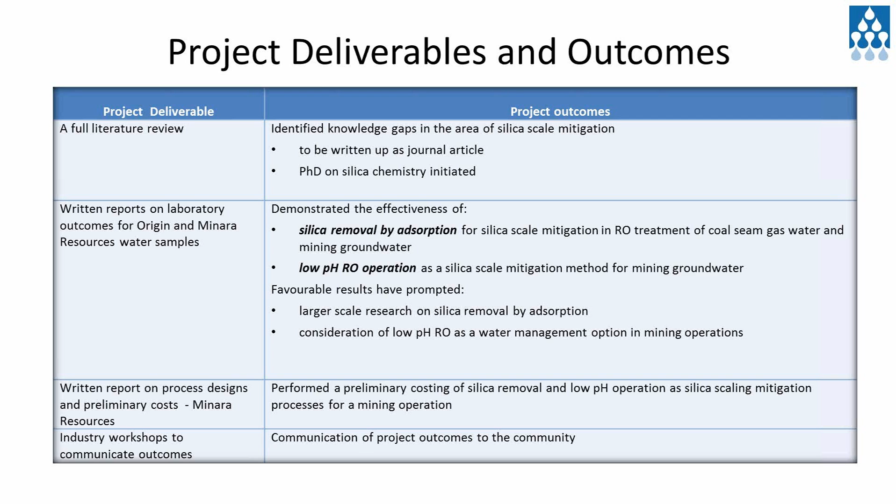We carried out a preliminary costing of the options for the mining water, and I'll be showing some results there. Finally, our last commitment was to participate in a workshop to show our results to the general community.

As an introduction, I put up a graph of the expected silica concentration as a function of water recovery, for a water that has 74 milligrams per litre silica. There you have two curves: the blue one is the silica concentration that would occur if no scaling occurs, and the red one is the actual concentration of soluble silica that occurs if silica scale starts to happen.

You can see in this curve you have consecutive doubling of the concentration as you go from 50 to 75, and then doubling again to 87.5. So that by the time you get to about 94%, its concentration would be 16 times the original concentration.

But as I said, we get silica scale formation, and to avoid that you have to run the RO process at a water recovery that is below that threshold. So with this one it would be roughly 60%.

Now, this limit I've put in, 200 milligrams per litre for silica, is very dependent on the actual water composition. It's very different to the type of calculations you can do for salts, for example, where you know the solubility quite accurately. For silica, it's very, very dependent on the composition of the water.

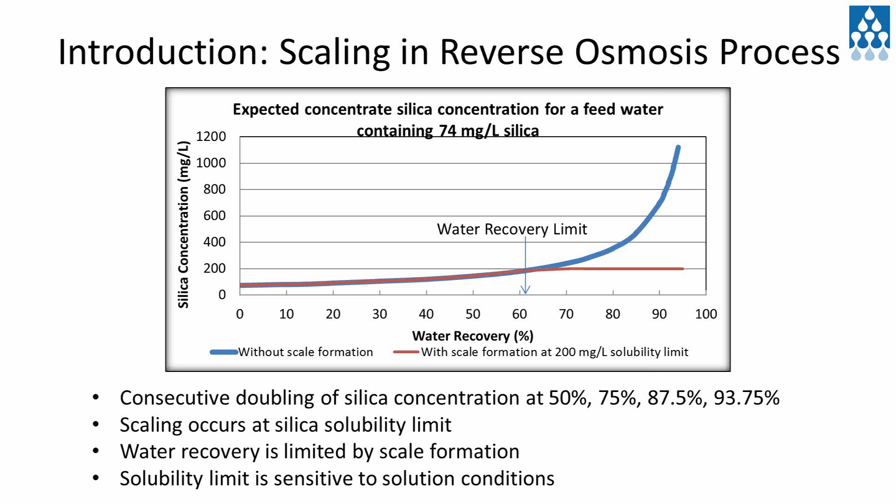This slide is supposed to show that there are different factors that must be considered when thinking about the solubility of silica. Firstly, there's silica's behavior in water - simply the reaction of water with SiO2, forming silicic acid. That's quite a simple system, and you know the concentration, the solubility, will increase with increase in temperature, according to a relationship that's been found empirically. There are, however, other factors which are important, and pH is really the greatest.

What you have is silicic acid acting as an acid, as the name suggests, and these are the acidity constants shown there at 25 degrees. Now you can see the first reaction has an acidity constant of 10 to the negative 9.8, indicating that at pH 9.8 there's roughly equal quantities of the anionic species and the non-ionic species.

If you increase the pH even further to 12, you get the production of the divalent ion as more acid comes off, more protons are released.

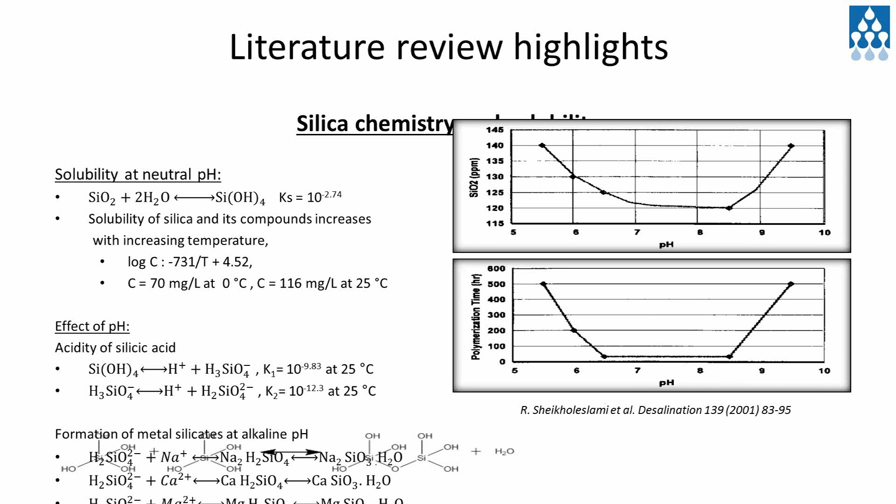The reason for that is probably that some of the silicic acid is being changed to silicate ion, so there's a lower concentration, and that's... but Nick will be talking about the chemistry in a little more detail later on, so you'll see the proper equations in Nick's presentation.

So in looking at the literature, we found two real ways of approaching the problem. One is to remove the silica, and one is to operate the RO under conditions where the silica has a higher solubility, so it doesn't precipitate.

Looking at the removal, there's a whole host of ways you can remove it. As I mentioned earlier, you can add calcium and magnesium under alkaline conditions, and that'll form the calcium-magnesium silicate precipitate. You can add other ions such as iron 3 or aluminium. You can generate the ions in solution by electrolysis, an electrolytic sacrificial electrode.

Or you can do a whole host of adsorption studies, or ways of absorbing it, using different adsorbents such as hydroxides or some naturally occurring minerals such as goethite, gibbsite, and alumina.

Another way is also seeded precipitation. If your solution is super saturated with respect to silica, if you add a seed of silica, you can induce that precipitation to take place. But that's only to the solubility limit of the silica.

And finally, you've got ion exchange, which you can do. If your silica is in the ionic form, you can absorb it or remove it onto ion exchange.

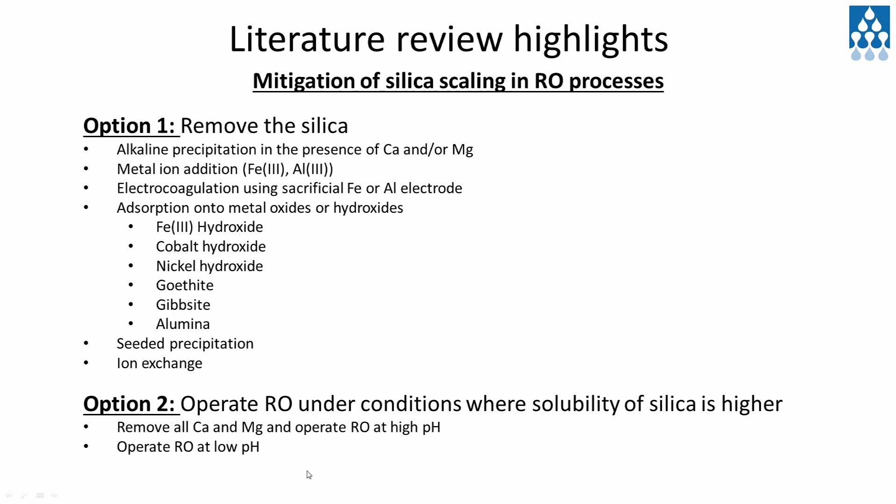So one of the waters that we started to work with was the coal seam gas water. In the process of extracting gas, you've got to extract an overlying layer of water, and that water contains a lot of salt. The volume that you have to extract to remove the gas is really quite considerable. It's estimated to be 150 gigalitres per year for the Queensland Basin.

Origin has the capacity to treat 32 megalitres per day in its current operations. Now, the water is so salty that RO is used to treat it, but they can only go to a water recovery of about 80%. After that, you start to get scaling.

So they would love to be able to decrease the volume of waste, that 20%, down to something more manageable that can be used in evaporation, or even to extract some of the valuable salts. I think that contains a high concentration of carbonate or bicarbonate, so you might be able to extract those. So you could reduce the volume to about a quarter.

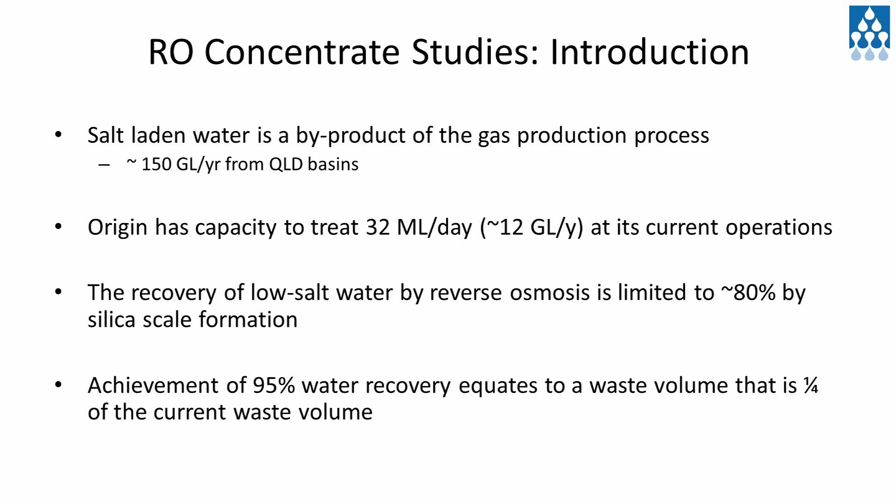Another benefit is also not only in the volume reduction, but also what you do with the water that's produced. You can actually make the area where you're doing your gas mining a very productive area by using the water for irrigation.

There I've shown a couple of graphs. What I've done is worked out an example of what happens if you're working at 80% water recovery with a volume of about 11,700 megalitres per year.

Since you're at 80%, you only produce about 9,300 megalitres per year of irrigation water, and that will allow you to irrigate about 1,600 hectares. The brine produced is 20% of the original figure, so about 2,300, and you would need an evaporation area of about 230 hectares. So if you do a ratio of the two, you see that you're able to irrigate only 7 times more than you have to take up by building evaporation ponds.

I've actually done that calculation for higher water recoveries, and the graphs at the bottom show the results. They've been corrupted a bit in loading them onto the presentation, but I think you can see a linear increase in the amount of area that you can irrigate. It's quite considerable, from about 1,500 to about 1,900.

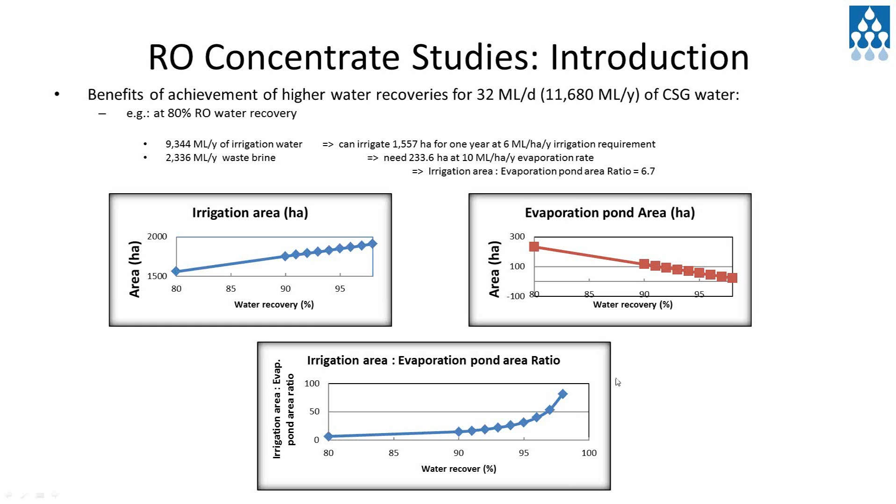The RO concentrate that we used, we of course analysed initially just to see what sort of things are in there. Things to note here: calcium and magnesium are quite low in these waters. Another thing is the organic carbon is quite high—it's a coal seam gas water, so it's not surprising that some organics have gotten incorporated into that water.

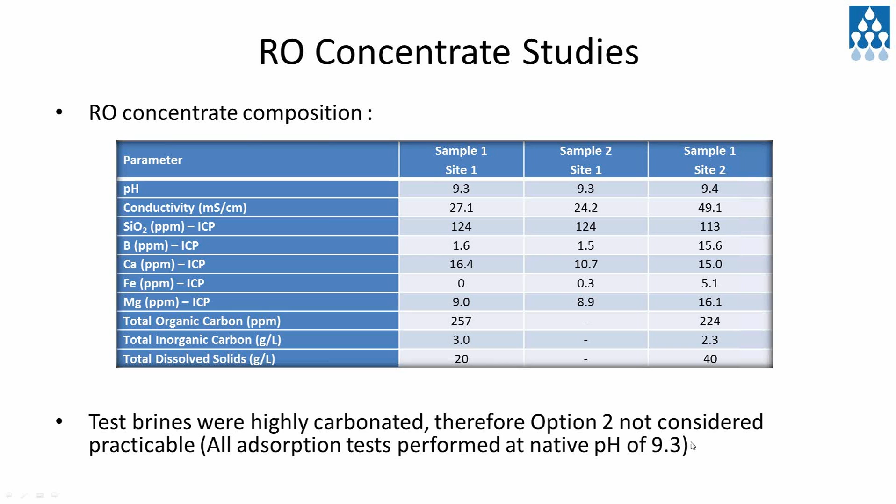Another thing about this brine is that it's very highly carbonated, as I mentioned earlier, so we were restricted to procedures that don't change the pH. So the low pH RO was ruled out, and also changing the pH to get better adsorption was also out of the question. So we worked at the native pH of 9.3.

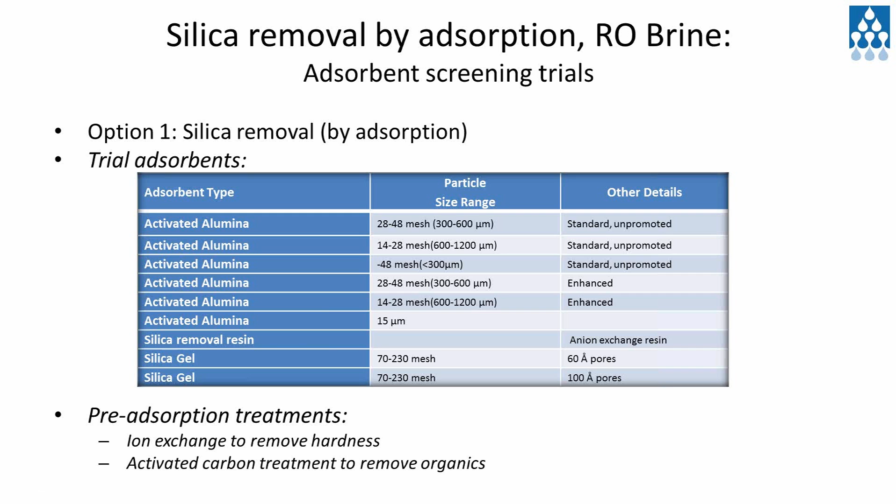We chose from the literature a number of promising adsorbents. Activated alumina was found in the literature to be quite promising, so we chose two different activated aluminas of different particle size. We also looked at silica removal using an ion exchange resin, and also silica gel of various pore sizes. What we also did was see whether pretreatment improves the adsorption using these adsorbents—pretreatment using ion exchange to remove the hardness, or using activated carbon to remove the organics.

Here's a result of the ion exchange pretreatment, just to show you that it's doing something. It's actually reduced the calcium and magnesium quite well for this sample from site 1. For this sample, we still have residual quantities of calcium and magnesium.

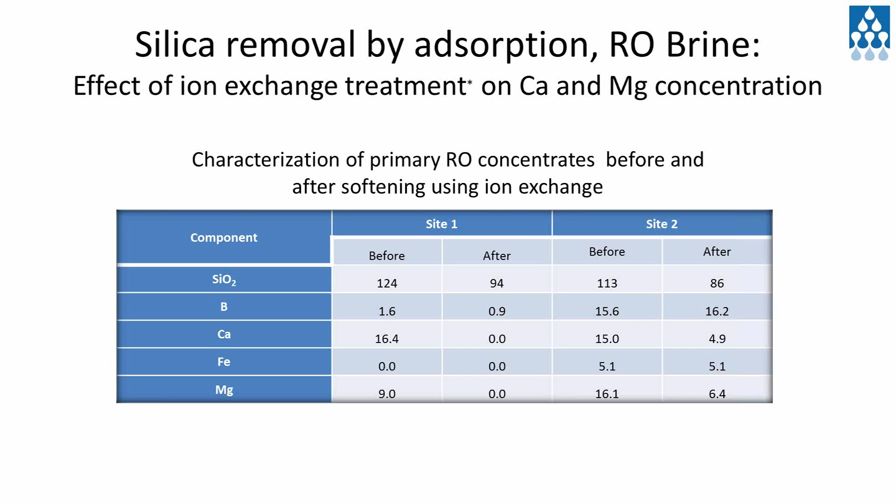We then took these treated samples and put them through the adsorption process using different aluminas. Now here you see on the left of the graph what I've called activated alumina 1, of different particle sizes. It's not surprising that the lower particle size works best because of the higher surface area. There we have the result for ion exchange.

That's an ion exchange process for removing silica. There we have the results for another activated alumina, and then the silica gel. You can compare those to the initial raw water concentration and the softened water concentration, and you can see these ones are the best out of this lot. Interestingly, some of them are even higher than the initial quantities of silica—that's basically because these are silica gels and they're dissolving in the water, making it worse.

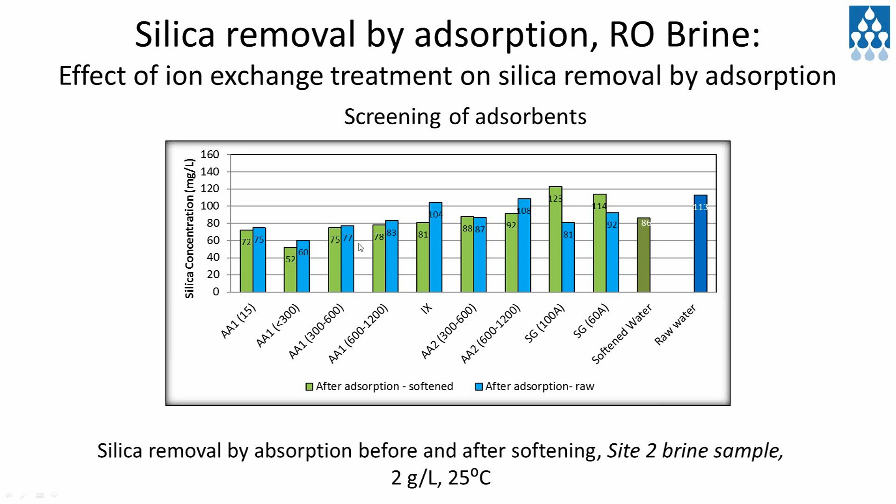Next we had a look at activated carbon as a pretreatment to remove the organics. We did UV spectroscopy on the sample before and after this AC treatment to see what's being removed, and you can see activated carbon is able to remove some of the components but not others. For compounds that absorb UV at 220 nanometers, that lower wavelength, for this higher wavelength there's quite a lot, almost total removal by the carbon.

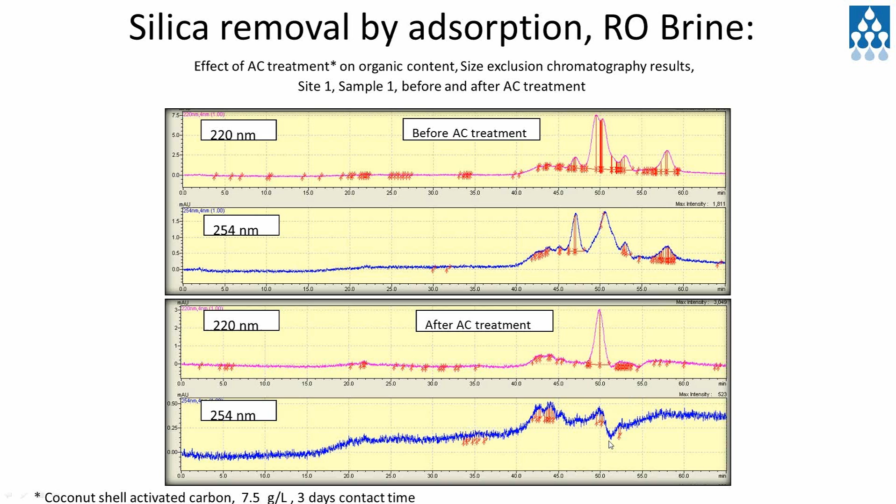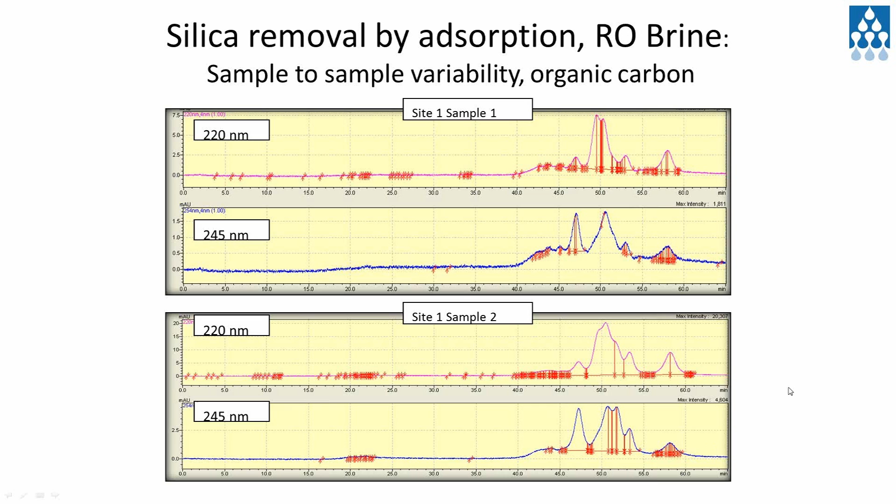We also found there was considerable difference in the organic carbon content of the samples, even from the same site. These are two samples from different times, and you can see quite different peaks, different quantities. Some peaks are not there initially, but they are after. So quite a lot of variability there.

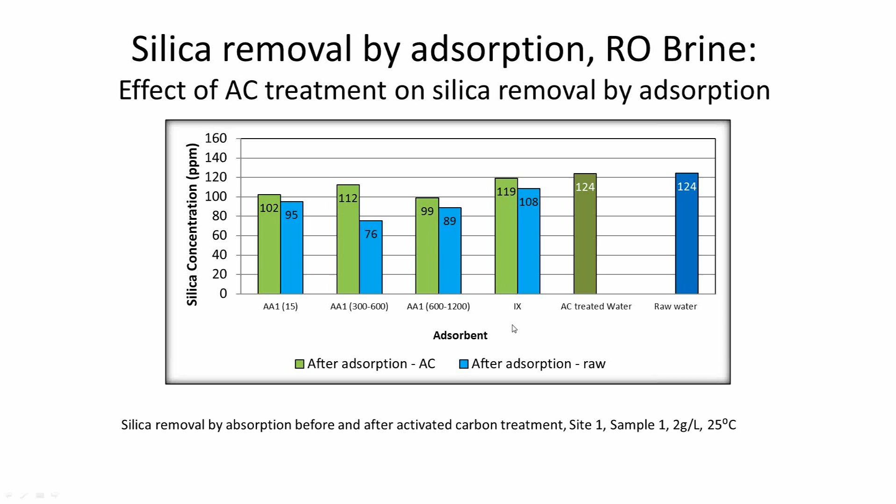These are the results for activated carbon treated waters, just to see if it makes any difference. This is a different sample, so the raw water values are different to the earlier graph. But you can see definitely that activated carbon treatment doesn't improve the adsorption at all—in fact, it seems to be making it worse. How that is, we don't know. The fact that they're all higher makes you think it's not just experimental variability, but there's something going on there.

To sum up this section, removal of calcium, magnesium and organics does not improve silica removal by adsorption, and activated alumina is able to actually reduce the value down to a lower value.

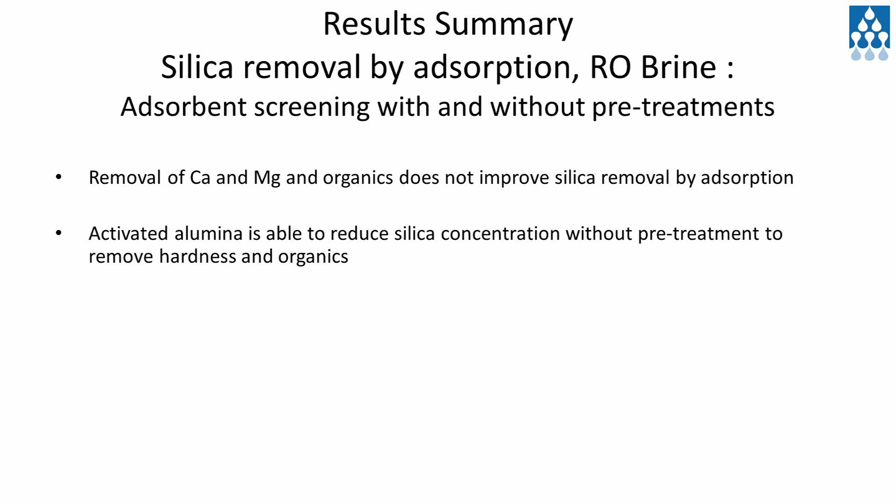We next went and picked out 3 of the activated aluminas that we trialed and did some further work to try to optimize the conditions a little bit.

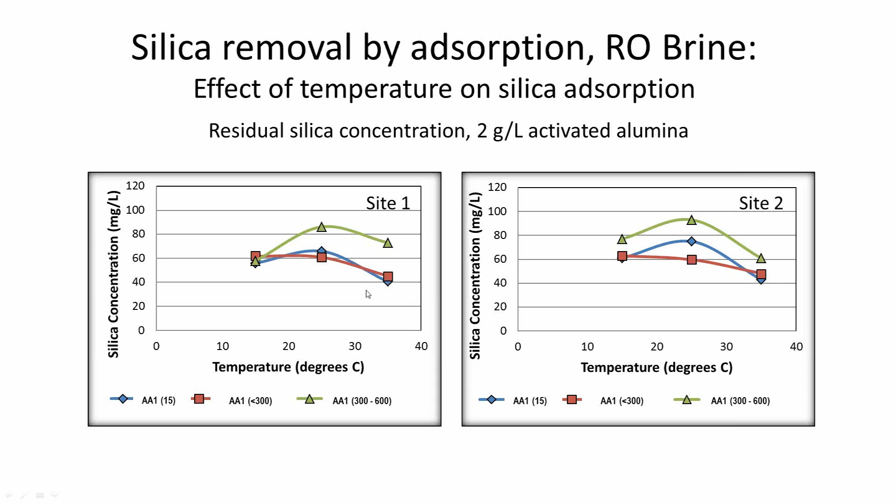Here we show the effect of temperature. You can see for the 2 samples they both have this curious hump at about 25 degrees. What we believe is going on is that we have two things happening: an increase in adsorption capacity of the alumina at higher temperature, but also increased solubility. I think it so happens that the solubility wins out over the increased adsorption at 25 degrees. But you can see that a higher temperature is actually quite a good thing to do - the best results are achieved at that higher temperature.

This is adsorbent dose, and you can see the 2 samples needed different quantities of adsorbent. So this really tells you that you have to do this sort of work to determine the optimum conditions for each specific site that you're going to be treating.

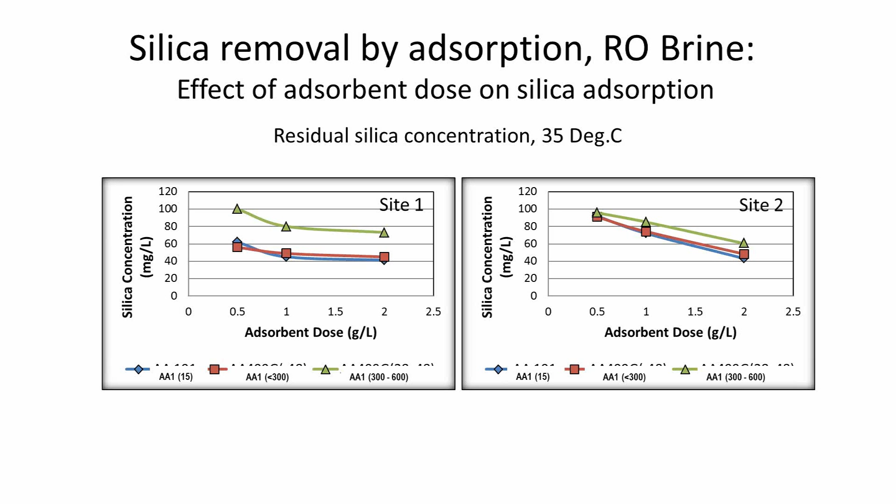To sum up this section, we know that silica removal by adsorption onto activated alumina is favoured by high temperature and high adsorbent dose. We know that we're able to get to about 45 milligrams per litre of residual silica using adsorption.

Given that the initial RO concentrate was at 80%, the curve shows us that we reached this 200 milligram per litre limit at about 80%. So we need to keep the water recovery below that for this RO treatment. Overall it ends up being about 96% water recovery. So that's very promising.

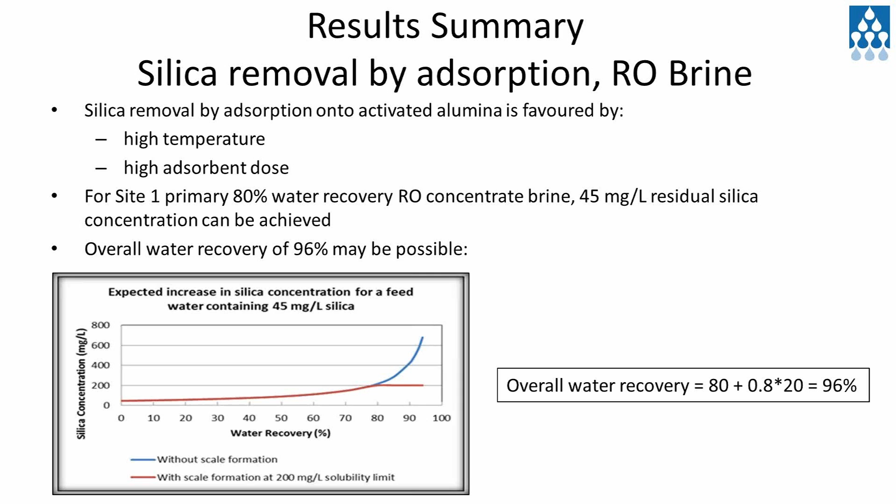The next slide shows really what I was talking about before, about the ratio of the amount of area that you devote to evaporation compared to the amount of area that you actually use the water for a useful purpose. So that's that graph put up again, just to give you a visual image of what's really happening - this is for 1/7 of the irrigation area at 80% water recovery.

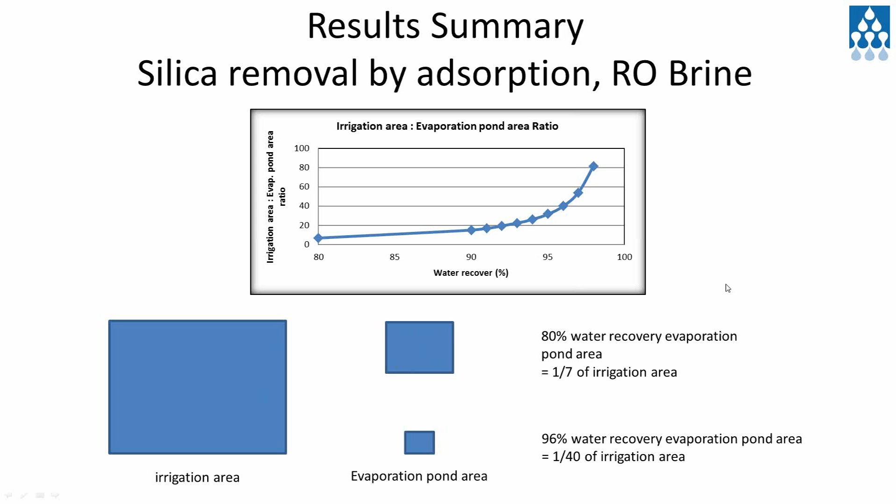You can use evaporation ponds that are 40 times smaller than the area that you irrigate. And then I think you can see that it's a much more viable process, prospective, to actually use this scenario rather than this, in terms of practicality of handling all this enormous amount of brine.

We also had a look at regeneration of the activated alumina. So you can adsorb the silica onto it, but can you reuse it? These experiments were performed to see if we can get the silica off the adsorbent and then use it again. These are some of the results.

You can see that we did a number of steps of sodium hydroxide treatment at 25 degrees on this activated alumina, and you can see that the silica concentration is quite high. It's coming off the adsorbent, but we also have quite a lot of aluminium being liberated as well.

So the alumina, we know, is a little bit soluble at alkaline pHs, and that's something that will have to be considered - that you're going to lose some of your adsorbent if you use caustic as a regenerant.

So that's just reprocessing of that data - the silica desorbed as a percentage of what's being loaded onto the alumina. You can see you'd need about 10 steps to reach about 80 or so - that's 10 rinses, if you like, with sodium hydroxide.

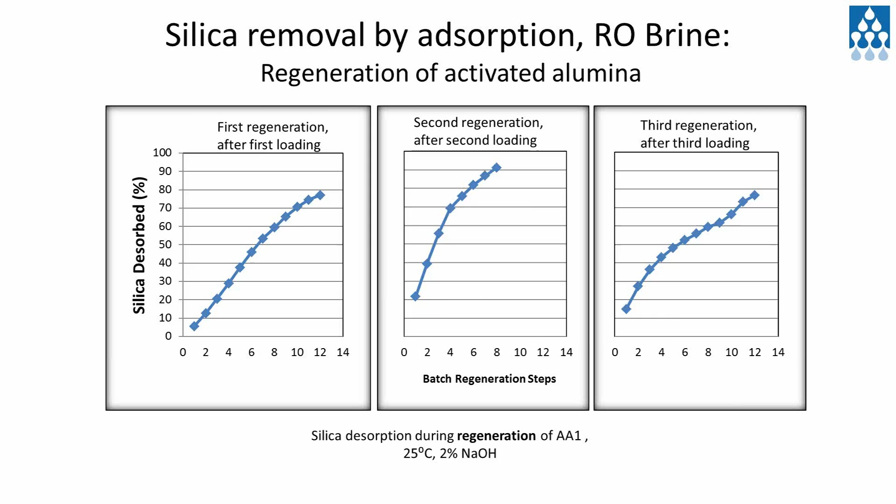And that's the adsorbent lost, the amount of alumina that's being lost. So it's quite considerable - if you take the average of those three, it ends up being about 5 or 6.

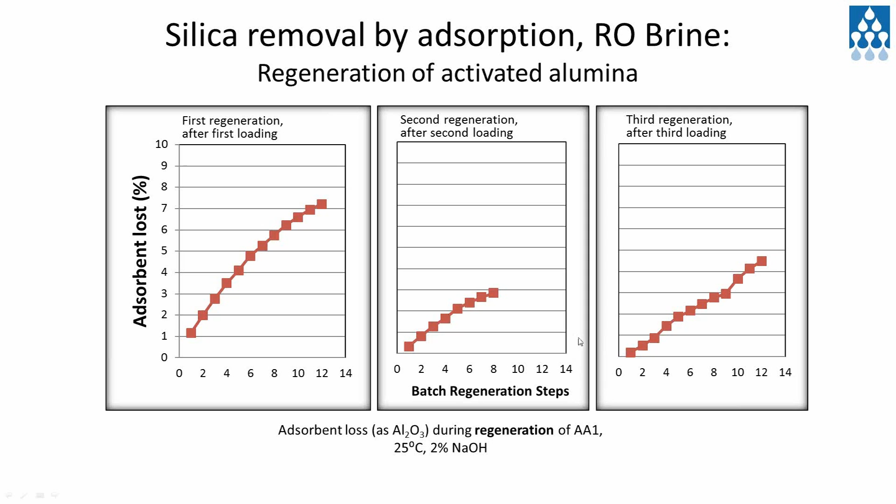That slide's just basically a reiteration of that earlier slide. So to sum that up, regeneration of activated alumina is possible using 2% sodium hydroxide. The silica loading rate of the regenerated adsorbent is still good after 3 adsorption, desorption trials, so that was good. But we had approximately 6% loss of alumina with each regeneration.

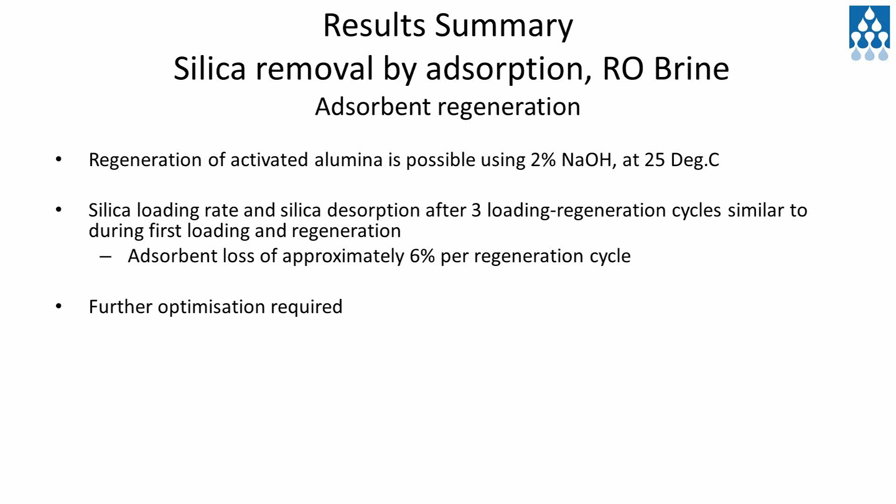So that's something to bear in mind, and you'd certainly want to optimize that on a larger scale. This is just lab experiments in small beakers.

Going on to the Minara Resources water - now this was a groundwater used by the company. It's actually a nickel mine, and it uses quite a large amount of groundwater, about 26 megalitres per day. This has to be desalted because the salts interfere with the process of mineral extraction, and also the salts corrode the process equipment. So what Minara does is they do a RO on it, but they can only achieve about 60% water recovery before silica starts to be a problem.

So if they could achieve 95%, that would be an enormous benefit to them. You'd get about 1/8 of the volume of waste from the process, and 1.6 times as much usable water out of the water that you extract from the ground.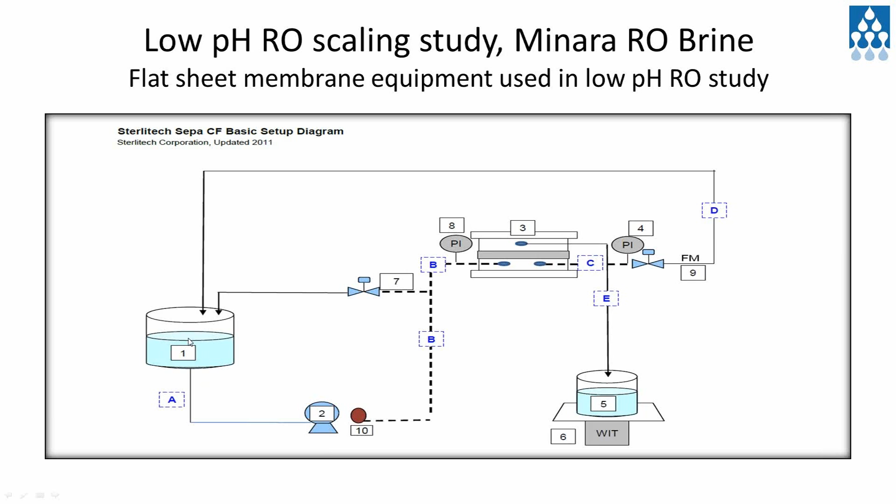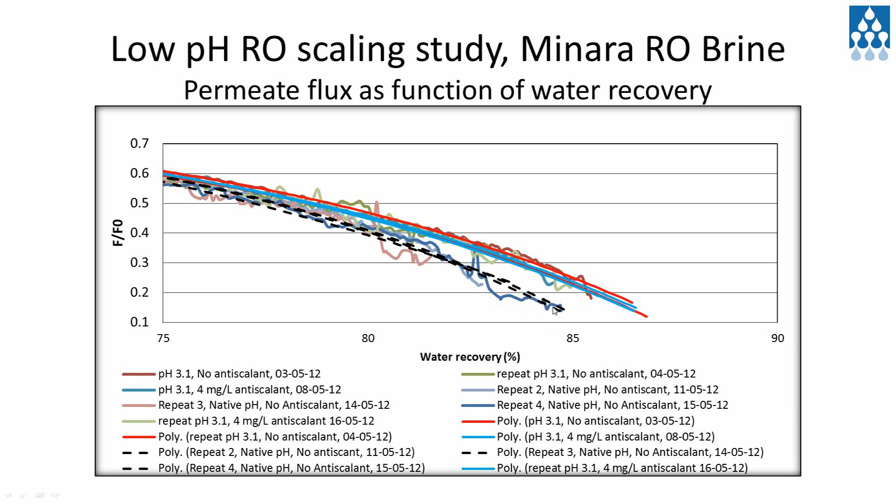The low pH runs were able to maintain a higher flux for longer, or higher water recoveries, than the native pH runs. You can see that having anti-scalant, the blue, is with anti-scalant, the red is without, and there's quite a good agreement of the results. At low pH, the anti-scalant doesn't seem to be making any difference, whereas we get quite a lot of flux decline with the native pH runs.

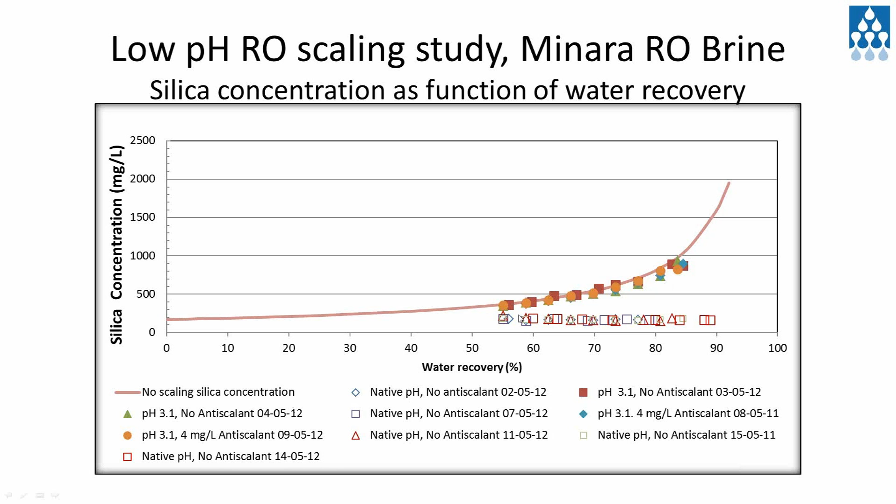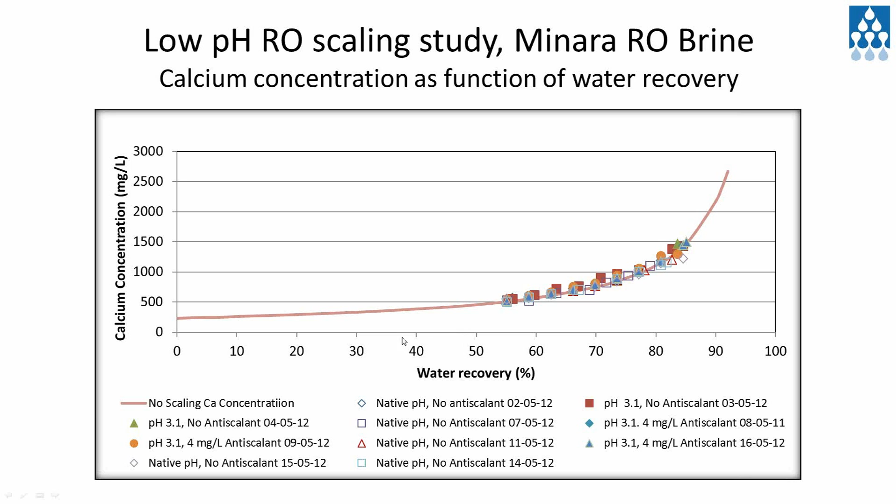What we did with the membranes at the end of those runs was put them through FTIR, and these are a few of those results. In grey here we have the unused membrane, which has its own characteristic peaks. The pH 3 curve showed us a little bit of difference in some peaks here. These peaks are probably bending vibrations of silicon and oxygen bonds.

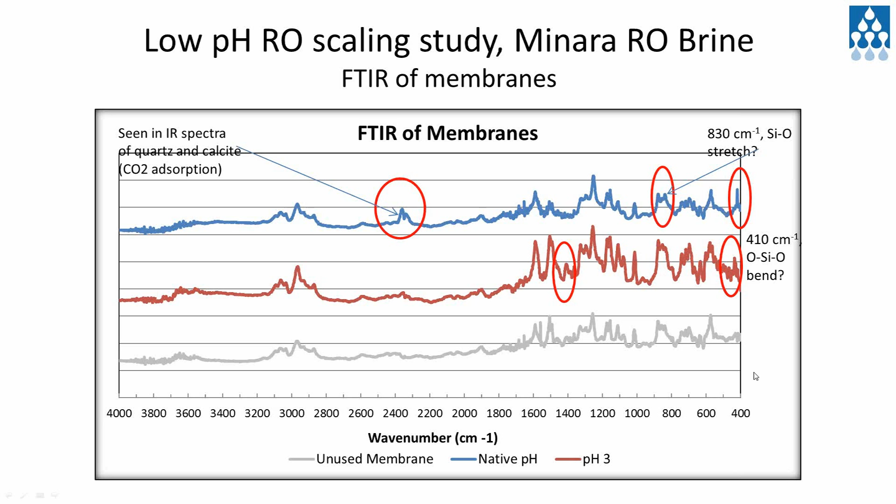This one we're not quite sure about, but you can see with the high pH run we also have another peak here, so perhaps a silicon oxygen stretch there. That's probably an artifact, often seen due to CO2 adsorption, so it could be that someone breathed on the membrane after collection. So that tells us there's something to do with silica perhaps happening in this membrane at high pH. When you have a look at them under the SEM, you can see the unused membrane.

It's really quite clear, there's no particulates there. This is all the material that the membrane is made of. At high pH, you can see lots of scaling, as you'd expect, enormous amounts of scale that's obstructing the view of the membrane completely.

And then finally, if you have a look at the low pH membrane, you can see that it's roughly, a lot of it's similar to the original, but there's some what look like to be scale particles there. Now that's not a representative sample, so you can't really say how much from that, but you can say that it probably started at scale at the end of that run.

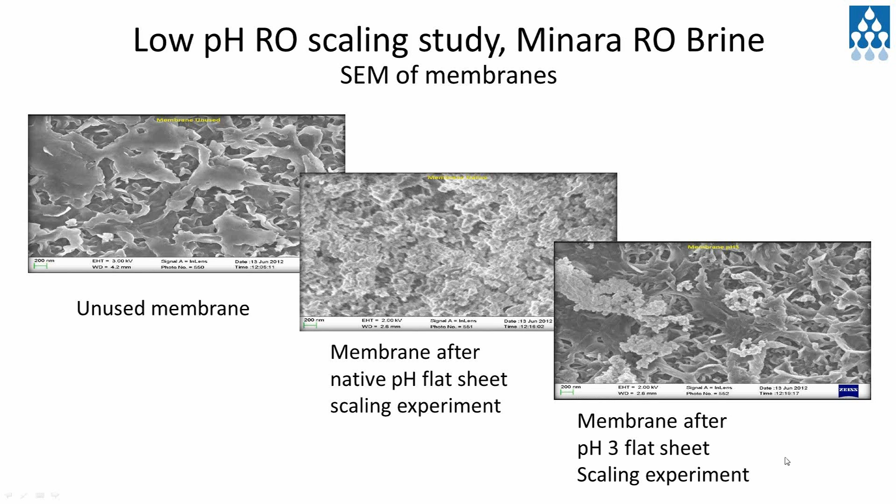What we see for the native pH, you see the appearance of a lot of other peaks: silicon, and there's also oxygen at 0.5, which is quite a lot higher than in the original. For the low pH membrane, the spectrum really looks quite similar to the unused membrane, really indicating that there's not much deposit of material on that membrane.

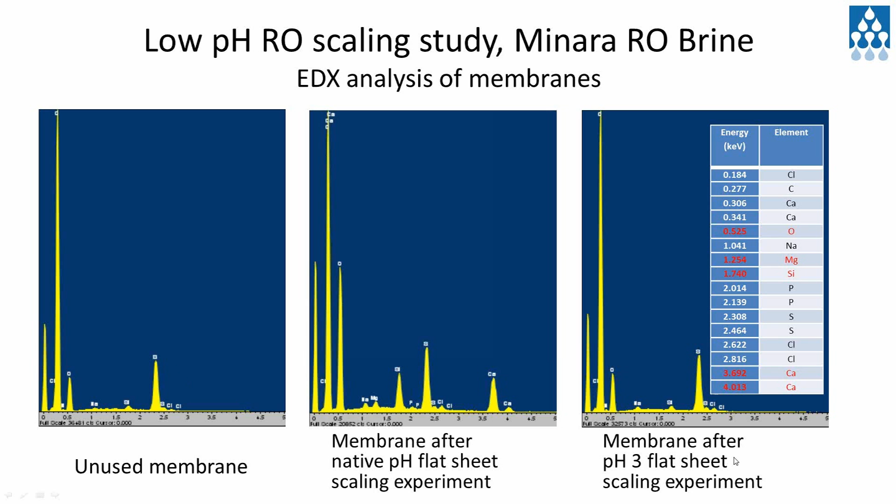So, low pH RO scaling study: we know that operating at pH 3 minimizes silica scale formation. We know that from the higher soluble silica at high recoveries at that pH, and from the higher permeate flux. And we can estimate from the 85% water recovery that we went up to that we could achieve about 94% with very little scale formation.

The FTIR data tells us something we probably already knew, that there's silica there and possibly carbonate. The SEM images confirmed that the flux decrease at native pH is due to scaling - you can see that scale there quite obviously. And low pH operation minimizes that scale formation. Again, EDX, the elemental analysis, tells us that at native pH conditions, silicon, calcium, magnesium, and oxygen are present.

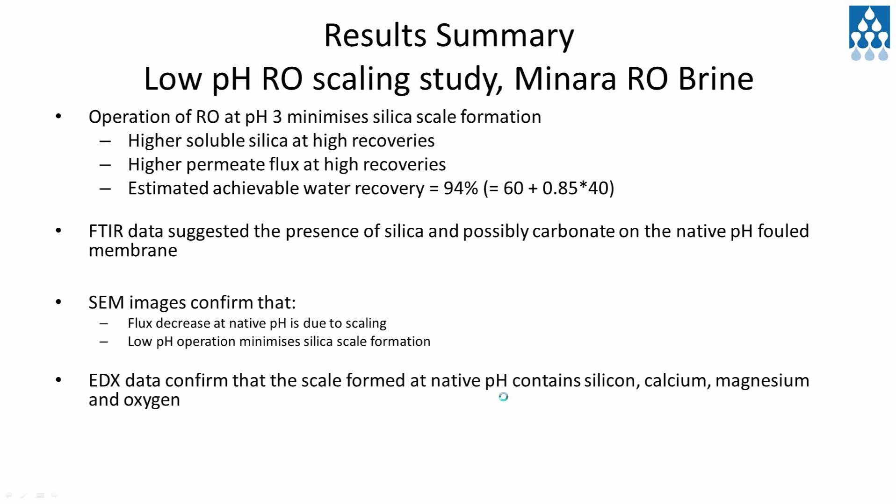So that's the low pH RO. We also did adsorption studies on this other water, similarly to the origin water. Here we see the effect of pH with a select number of different adsorbents. You can see that with no adsorbent, the curve looks quite like that and actually decreases on its own without any adsorbent being present if you have a high enough pH.

Adding the adsorbent makes a little bit of a difference, and the greatest difference is made at about the native pH of the water, which is 8.6 in this case. That is with activated alumina of very fine particle size. If you have a look at the calcium concentration, it does a similar thing, and magnesium too.

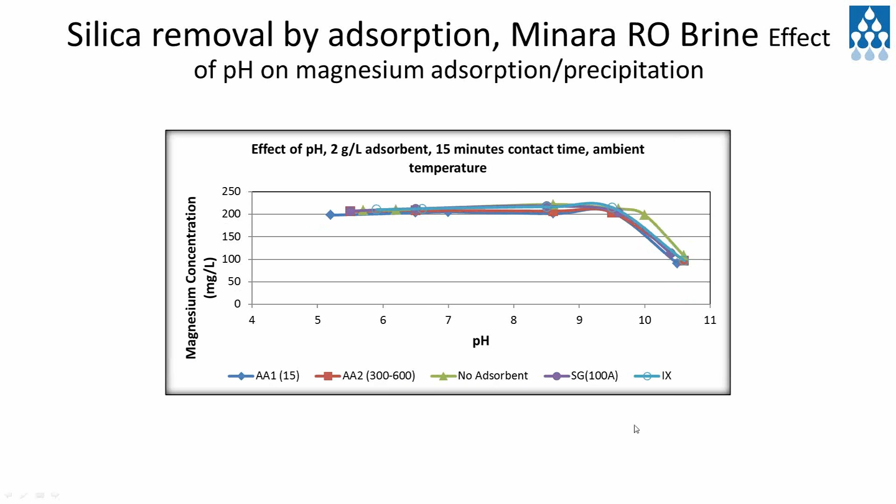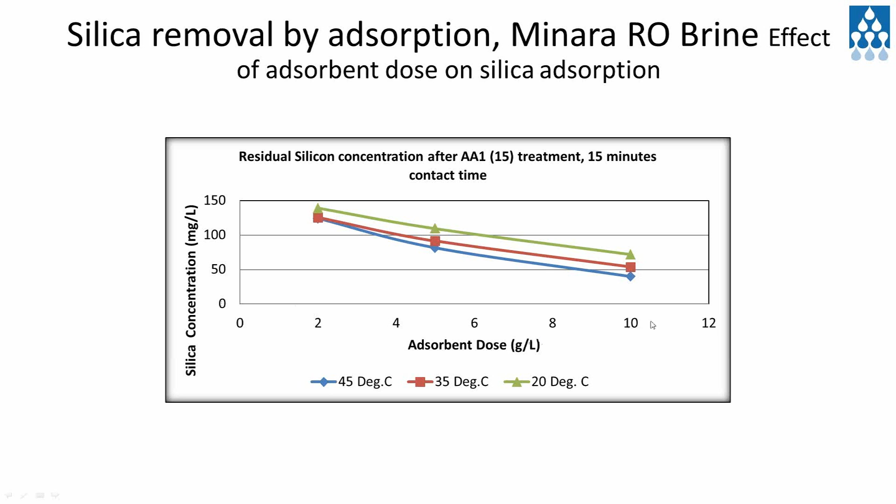We also had a look at the adsorbent dose at different temperatures, and you can see, again as we saw earlier, more adsorption at higher temperatures, and obviously if you have more adsorbent there you'll get more removal. But the quantity there is quite enormous compared to the other sample - the other sample we're using 1 or 2 grams per litre, this is at 10 grams per litre. So it's going to be a much more expensive process for this water.

I'm sorry about the quality of that, it's moved again. But you can see you can achieve quite low silica concentrations if you have high doses of adsorbent and quite a high temperature.

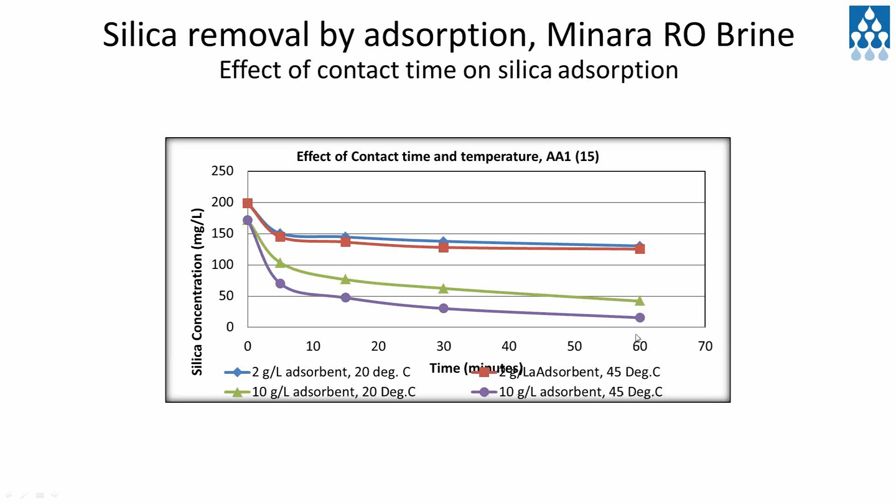So that value is about 16. If we put that value as a starting concentration in our modelling, we can see we can go all the way up to 90 before we reach that 160 ppm silica formation threshold that we saw.

So again, we have initial concentration of 60, initial water recovery that the company carries out is 60. We carried out RO on that, and we got 90%. So 90% of that remaining 40% gives us a total of 96%.

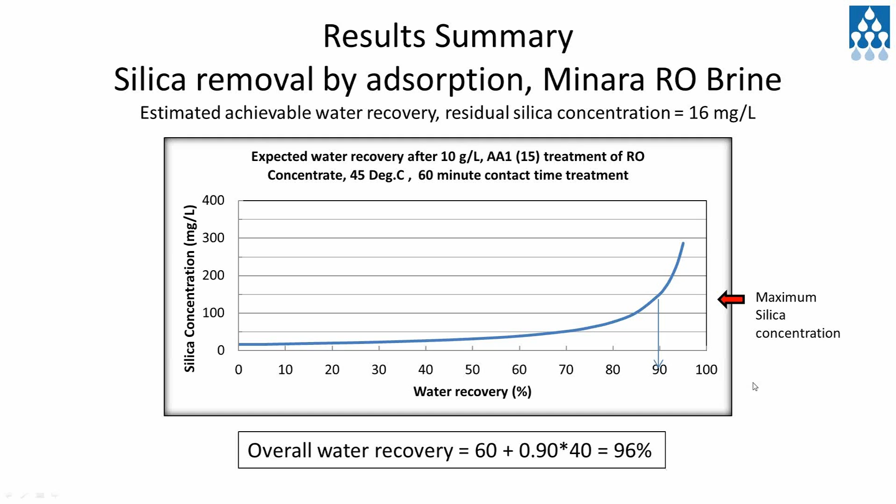We also did some very rough, not modelling, but cost analysis of the different options. The options we had a look at were low pH RO and batch mode. We looked at just precipitation without any adsorbent, but with a sedimentation stage to remove that silica. And then we looked at two different temperatures for removal of the silica using an adsorbent.

So you can see that the low pH alternative is really the most economically favourable, if you like, with pretty low capital expenditure and very low operating expenditure. Precipitation is quite expensive, mainly due to that sedimentation stage you need - enormous sedimentation tanks to remove the removed silica, and operating expense is a little bit higher.

When you look at the alumina options at ambient temperatures, obviously you'd need more alumina than at higher temperatures. So there's a saving in the capital expenditure because you've got smaller equipment - the equipment works, you can achieve the same value with less alumina.

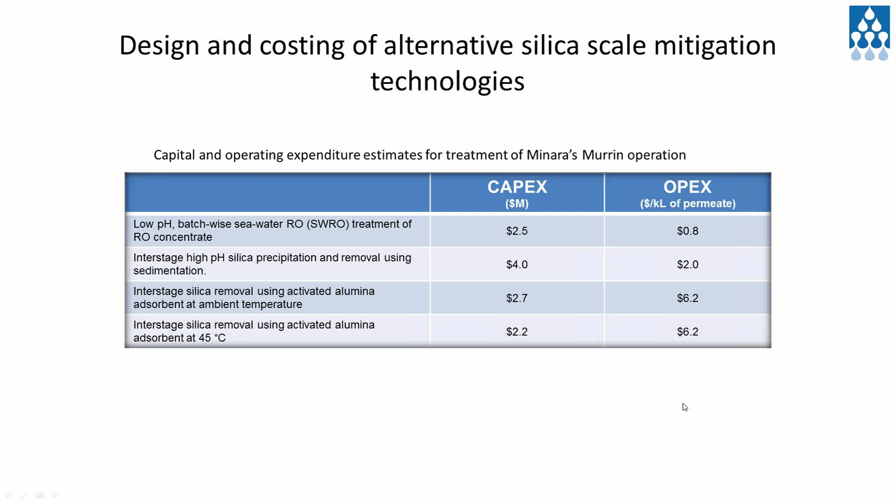So, final conclusion on coal seam gas: high buffering capacity prevented other investigations, so we only looked at adsorption.

You can remove silica, and we estimate that 96% water recovery might be achievable. You can also regenerate the adsorbent using caustic, but you've got to keep in mind that you've got quite a considerable loss of alumina, and you really need to further optimize it on a larger scale to see what's going on there.

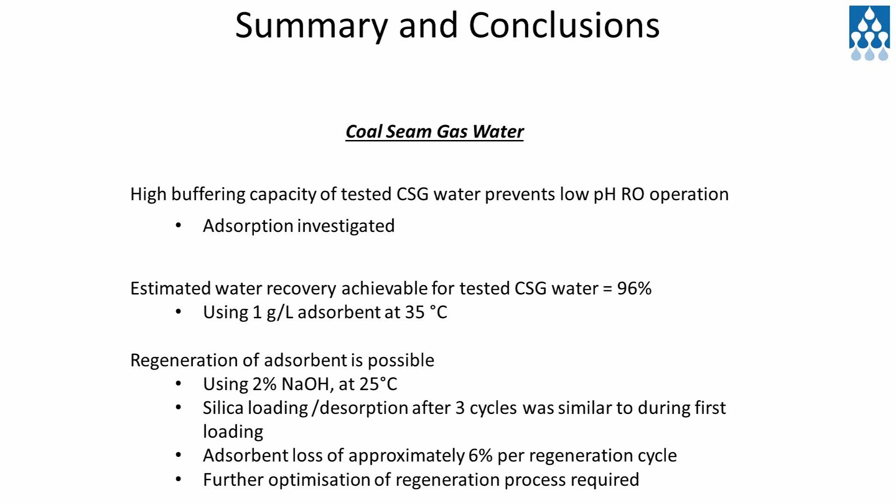For groundwater from the mining operation, we had a look at both alternatives: low pH RO and silica removal by adsorption, and also had a look at precipitation as well.

We estimate from the low pH RO that you might be able to achieve about 94% water recovery using that, so obviously you'd use batch mode. With the adsorption, you can estimate to achieve 96% water recovery.

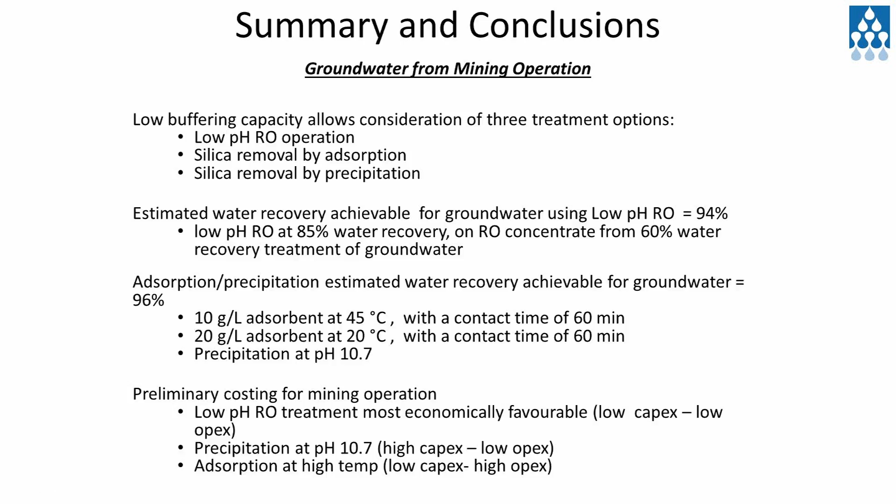And preliminary costing, very rough costings, really tell us that low pH RO might be a better alternative than the other ones for this water, because of the high expense of a large amount of adsorbent required for this water. So with that, I thank you and ask if you have any questions.

Thank you, Peter. Questions from the audience?

The question was: does the costing include pH adjustment back up to a neutral pH for use of the water?

I think they're able to use the water at very low pH in the mine, so they don't need to bring the pH back up again. So it's not a cost. It's actually good, because you're using acid anyway to lower the pH. So you're going... Exactly. Yes.

Okay, question? In terms of the operating costs, as you put up, I guess I just need some clarity. Are we talking about water from a tailings pond, which is aerated, or is it direct from the extraction process?